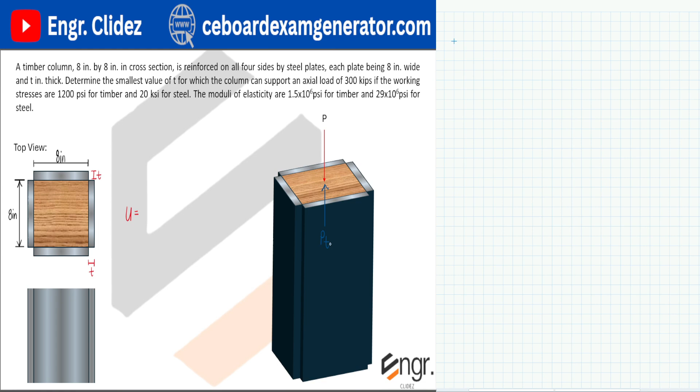Now, we first check why this is statically indeterminate. For our number of unknowns, there are two materials that will resist the load P. First is timber, and next is itong steel plates natin. So, di ba, if yung timber saka yung steel magre-resist, then merong force dito which will oppose the downward load. This will be the force in, sabihin natin, timber. And aside from the force in timber, yung steel natin is evenly distributed sa sides ng timber. So, its centroid will be located dito rin sa gitna. So, aside from the force in timber, there is also a resisting force generated by the steel plate. So, plus PST. So, our number of unknowns are 2. We don't know the force in timber as well as the force in steel. Ayan, 2.

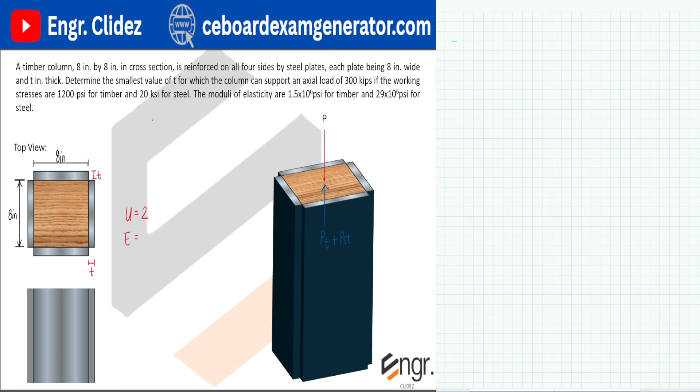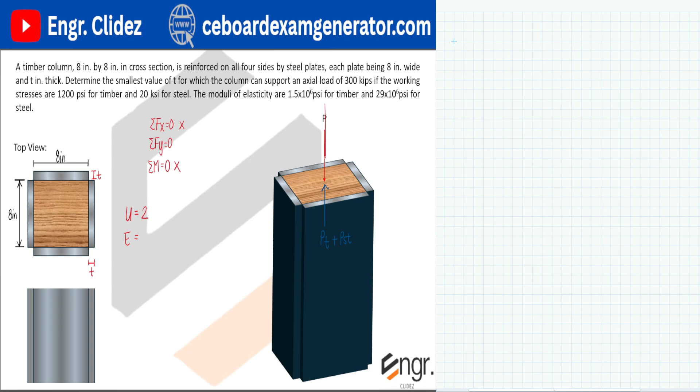Now, for our equations, again, we have 3 statics equations. First is summation of forces along x equals 0, summation of forces along y is equal to 0, and summation of moments about any point must equal 0. Now, we cannot apply summation of forces along x equal to 0 since lahat ng external loads natin are vertical as well as our reactions. We also cannot apply summation of moments equal to 0 since we have a concurrent force system. All lines of action of the forces coincide with this line. Ayan, nag-act dyan sa center. So, walang rotation na makikreate. Now, summation of forces along y, we can apply because our external load is vertical and our reactions are also vertical. Therefore, we only have one available equation.

Now, for the degree of indeterminacy, we solve it using u minus e. Our number of unknowns is equal to 2. And we have one available equation, so this is indeterminate to the first degree. Therefore, we cannot solve the unknowns using statics alone. We have to use other methods. In this case, we will use the relationships of the deformation. But you will later see na it will reduce into the relationships of the stress, since binigay naman yung working stresses nila.

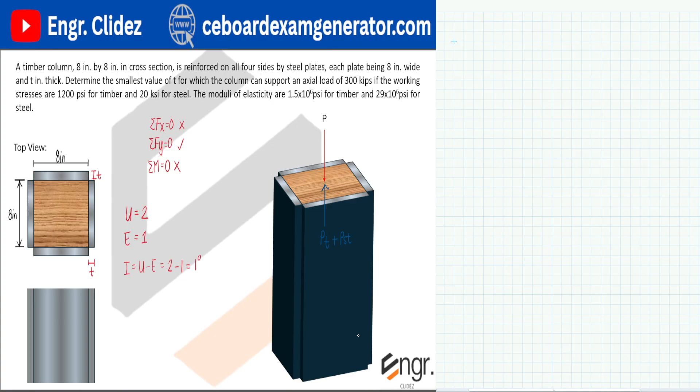Now, we first develop our equation. Again, this is the top view. Ito naman yung 3D view. Then, kapag tiningnan natin siya, let's say, andito yung point of view mo, tinitingnan mo siya dyan, ito yung makikita mo. Yan yung front view. So, for the front view, we have a load P. And then, for our resisting force, we have the force in timber plus the force in steel. So, if we sum up forces along the vertical equal to 0, we would have PT plus PST is equal to the force P. In-equate lang natin yung upward saka yung downward force.

Ayan, PT plus PST. Now, recall na yung axial stress natin na formula is stress equals force divided by area. So, itong forces natin, yung PT saka PST, force in timber and force in steel, we can transform it into stress multiplied by area. Since obtaining P, di ba same lang sa stress multiplied by area. So, ito, gagawin kong stress in timber multiplied by the area of timber.

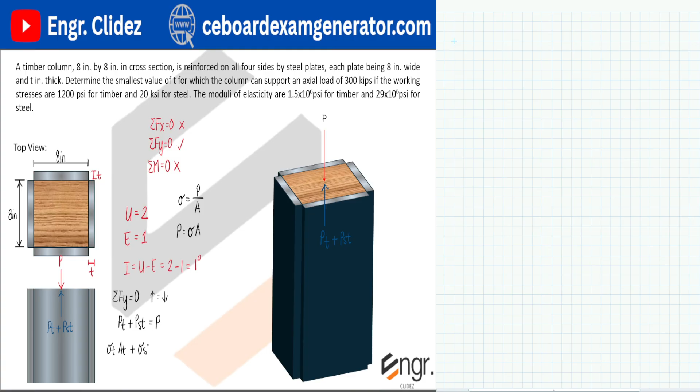Then, the PST naman, stress in steel multiplied by the area of steel. Then, equate natin sa P. So, we have here stress in timber. Ano yung area ng timber? Diba ito yung timber section? This is a square section. So, yung area ng square is simply 8 squared or 8 by 8. Gawin natin 8 squared.

Then, plus the stress in steel. Yung area ng steel naman is 4 na 8 multiplied by T. Diba, yung area ng rectangle na yan is 8 inches multiplied by the thickness. Then we have 4 sides. So 4 multiplied by 8 inches multiplied by the thickness. I hope agree lang. Then equate natin yan sa P.

Ano yung P? Diba yung P is given? The applied axial load is equal to 300 kips. Yung meaning ng K is kilopounds. You can write it as kips or K na lang. So we equate this sa 300. So diba unknown yung stress in timber saka yung stress in steel.

Now dito usually nagkakamali yung mga students. And ito rin yung pattern ng trap ni Ma'am Praxi sa PSAD ng CE board exam. Di ba, merong binigay na working stresses for timber, 1,200 PSI. For steel naman, 20 KSI. So usually, sinasubstitute na lang yung 1,200 dito. Then, 20 KSI for steel, sinasubstitute dyan sa sigma ST. Then, sinosolve nila yung T. But that's actually the wrong process.

Bakit? Meron kasing relationship sa deformation ng steel sa timber. And hindi pwede na yung timber sa steel would actually use the working stress to its ultimate capacity. Although the load is applied dito lang sa gitna, usually merong bearing plates yan if meron kang column. Kapag merong bearing plate, the deformation of steel and the deformation of timber will be equal. Hindi naman pwedeng nag-apply ka ng load, tas yung timber lang yung mag-shorten. Ni-reinforce nga, so this system will act as a group. So whatever the deformation of steel is, yan din yung magiging deformation ng timber.

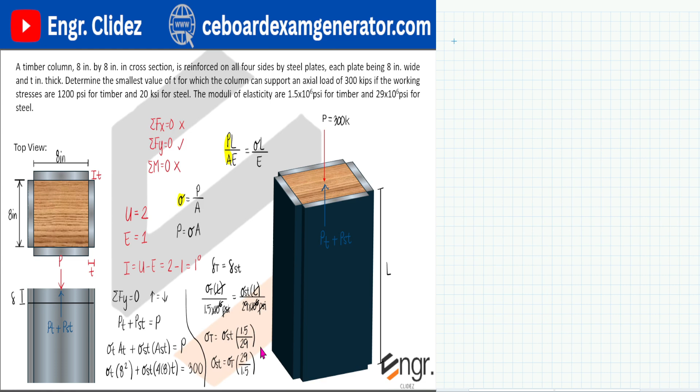Now, we have two assumptions here. First, we will assume that timber governs. If timber governs, then we express the stress in steel in terms of the stress in timber. Ganyan yung gagawin. Now, if we assume na steel governs, then we express the stress in timber in terms of the stress in steel. So, ito yung pinaka-important na part.

So, yung first natin gagawin, we assume that timber governs. Then, sulat natin yung mga working stresses nila. The working stress of timber is equal to 1,200 PSI. Then, for steel naman, we have 20 KSI. So, 20 KSI is just equal to 20,000 PSI. Convert na lang natin. Now, take note na yung 300 dyan is in kilopounds. Para consistent siya sa PSI, then we need to multiply this by 1,000.

So, first, assuming timber governs, we copy this equation. Sigma T times 8 squared plus stress in steel multiplied by 4 times 8 multiplied by T is equal to 300 kips, then times 1,000 para maging pounds. So, assuming timber governs, papalitan natin yung stress in steel in terms of this para naka-timber lahat. And we use the working stress of timber to be able to solve the thickness.

So, sigma T times 8 squared plus sigma ST, this expression, sigma T multiplied by 29 over 1.5 multiplied by 4 times 8 multiplied by T is equal to 300. Gawin na lang natin times 10 to the 3. Ganito yung pag-input sa calculator. Anyway, gagamit lang tayo ng MathCAD. So, we have sigma T times 8 squared plus sigma T times 29 over 1.5 multiplied by 4 times 8 times T is equal to 300,000. And we solve T.

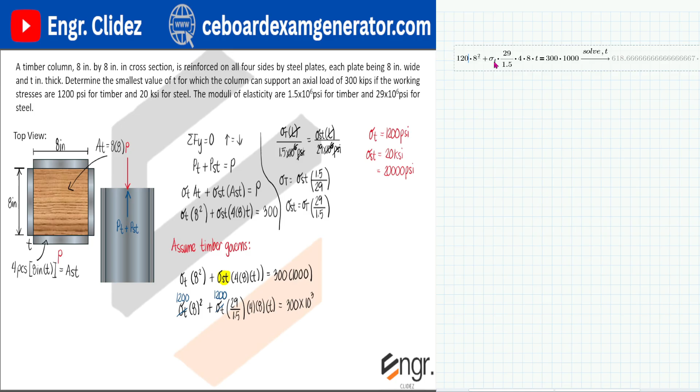But again, for stress in timber, we use the working stress. Yung pinakamalaki na stress na makakaya ng timber. So, gagawin natin yung 1,200. Ito rin, 1,200. So, again, yung 1,200 is naka-PSI, kaya ginawa nating pounds din ito. So, we change this one. Gagawin natin 1,200. If we solve the thickness, we obtain this value. Assuming timber governs, we have 0.3 inches. Unit is in inches pala.

Thickness kasi. Now, for the other thickness, we assume that instead of timber, steel naman. Assume steel governs. If steel governs, then we use the full capacity of steel. So, we need to change this one. Papalitan natin yung stress in timber in terms of steel. So, we have stress in steel multiplied by 1.5 over 29 multiplied by 8 squared, then plus, ito, retain lang, stress in steel. So, we can copy this one.

Then, this will be the working stress of steel, which is 20,000 PSI multiplied by 1.5 over 29. Tapos, ito naman, sigma ST, papalitan natin ng 20,000. So, tanggalin natin to. We have 20K. Ito yung papalitan natin na stress in steel, gagawing 20,000. And then we solve T. So, solving T, assuming steel governs, we get a value of 0.365.

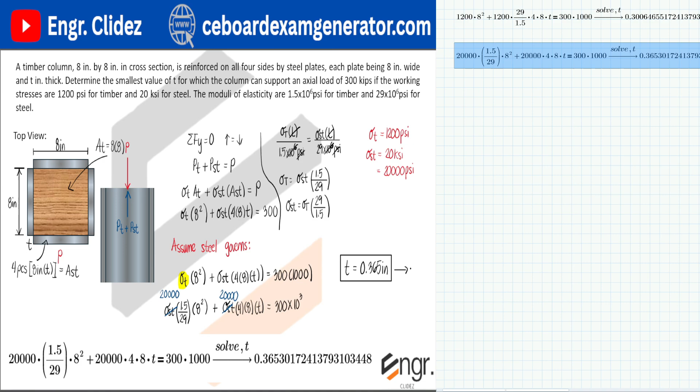So, let me remove this one. Copy natin yung equation. So, for the actual thickness na gagamitin natin, we choose the larger one. Larger thickness, mas safe yung member kasi mas malaki yung cross-section. 0.3 if timber governs, if steel governs, 0.365. So, our final answer is yung thickness na gagamitin will be 0.365 inches. Reason being, we choose the larger one. So, para mas complete, we also indicate that the working stress of steel governs.